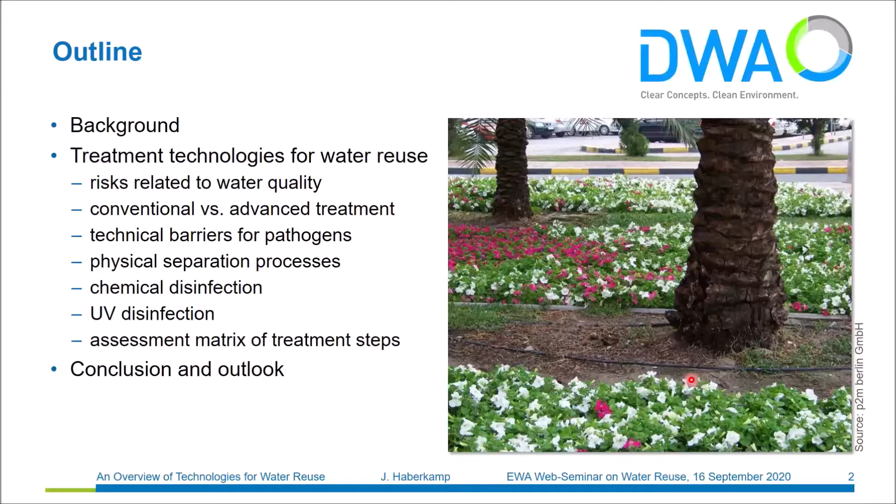I am giving this presentation as well on behalf of our DWA working group on water reuse. DWA is the German Association on Water, Wastewater and Waste. And our working group on water reuse is one of more than 350 specialist groups within DWA. Currently we are around 15 experts from different institutions. And I won't go more into detail, but as you see, Dr. Lahnsteiner is also a member of our group, and he will give a presentation on case studies later on.

Besides the definition of technical standards, especially focusing on wastewater treatment, DWA also publishes a more or less loose series of so-called DWA topics dealing with different issues in terms of water management and water treatment. And our working group has published a topic on treatment steps for water reuse in 2008, where a variety of different treatment technologies were characterized and assessed with regard to non-potable water reuse, focusing on irrigation.

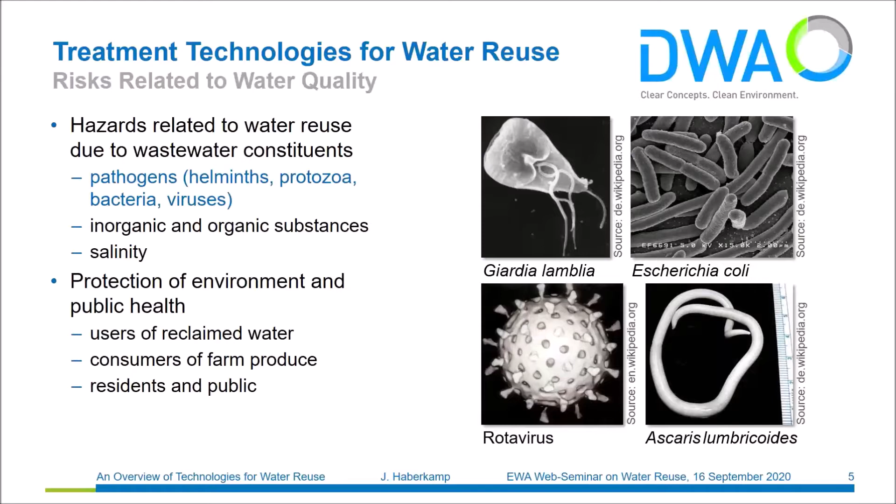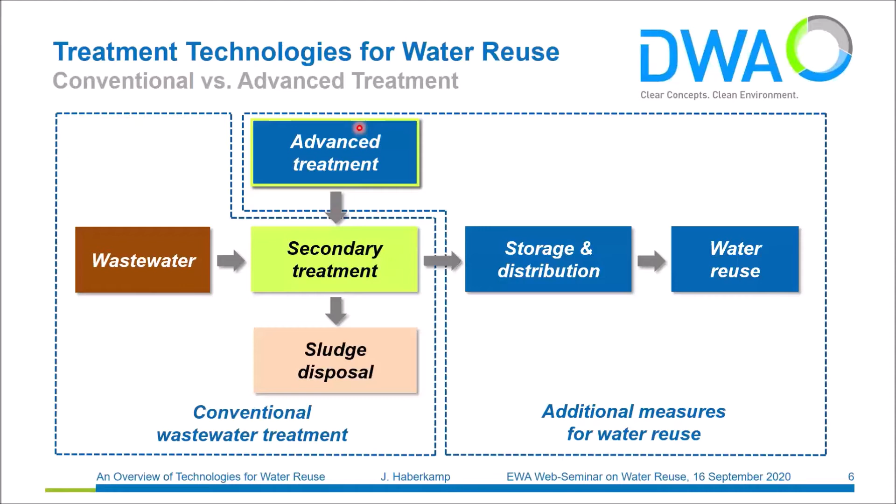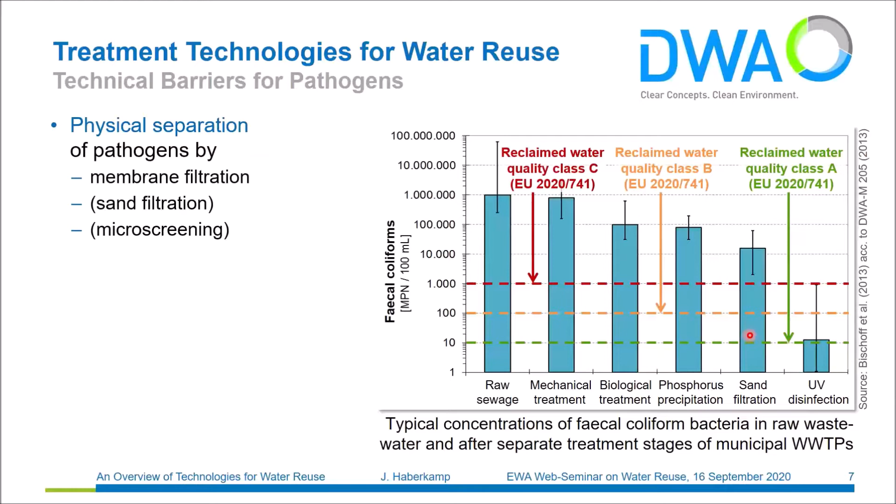So disinfection of secondary effluent can be achieved by different means, by different categories of technologies. First of all, there's the physical separation of pathogens, which can be efficiently achieved by membrane filtration. I also added sand filtration and microscreening, but I put it in brackets because, as you already saw on this diagram, sand filtration does not lead to the removal of bacteria and viruses, and the same holds true for microscreening. But sand filtration and microscreening can remove protozoa and helminth eggs.

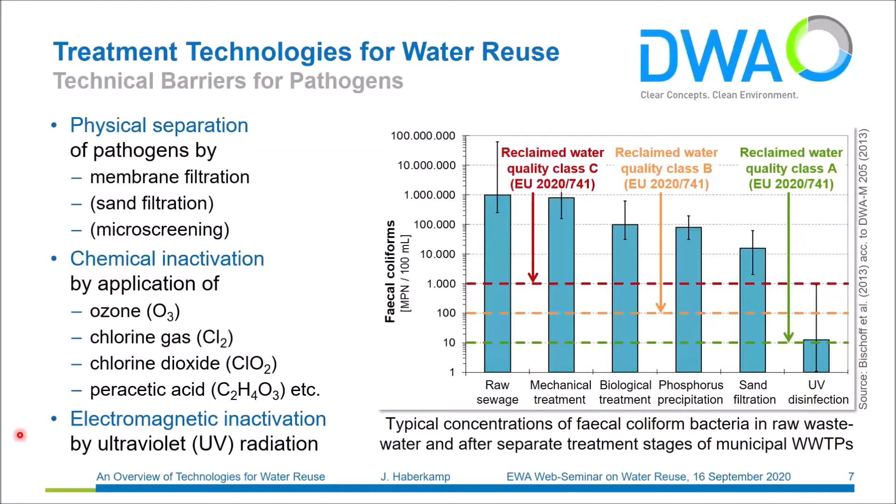Then there is the use of chemical disinfectants, which can be, besides chlorine gas or chlorine dioxide, also ozone, peracetic acid, and others. And finally, disinfection can be achieved by the use of electromagnetic radiation, which usually means UV radiation.

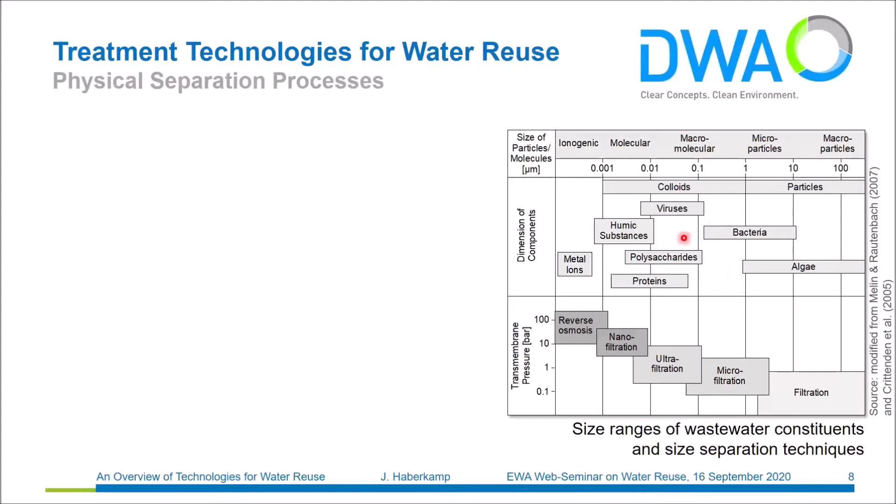So when we try to physically separate these microorganisms from the wastewater, we can use low pressure membranes, which include ultrafiltration and microfiltration membranes. The pores of these membranes are so small that not only protozoa, helminth eggs, and bacteria are efficiently retained, but also partly viruses, which are often attached to other particles.

A drawback of the very efficient membrane filtration is that it has increased demands in terms of energy input, pre-treatment, as well as operation and maintenance.

Sand filtration is a cheaper alternative for the removal of protozoa and helminth eggs. But as you already saw on the previous slide, bacteria and viruses cannot be removed by sand filtration. So in order to achieve efficient disinfection using sand filtration, another disinfection step has to be added, usually UV disinfection.

And in terms of microscreening or microsieves, the removal efficiency is quite comparable to sand filtration, depending on the mesh size of the microsieves.

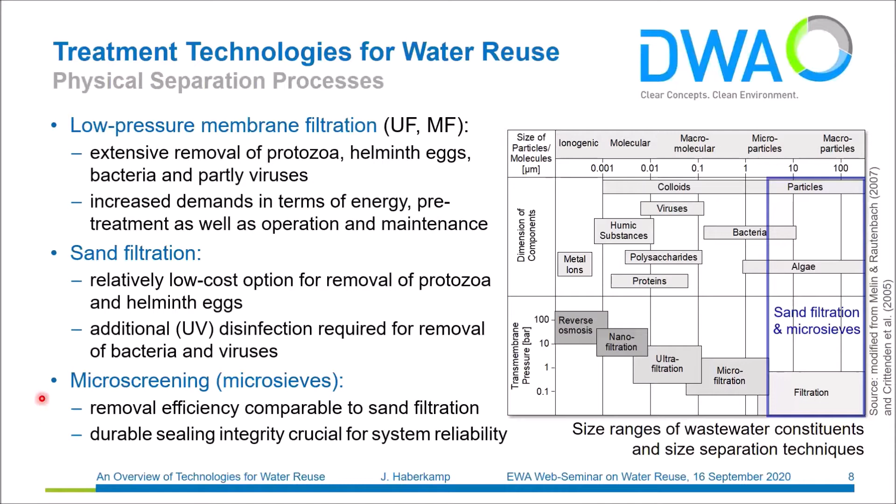But there's one neuralgic point in terms of microsieves. The removal efficiency is not only defined by the mesh size, but also by the integrity of the sealing of the microsieves. The microsieves are attached to some kind of supportive structure, and from time to time they have to be removed, physically cleaned, and then put back again. With time, this sealing suffers, so experience has shown this is often quite a crucial part of the system.

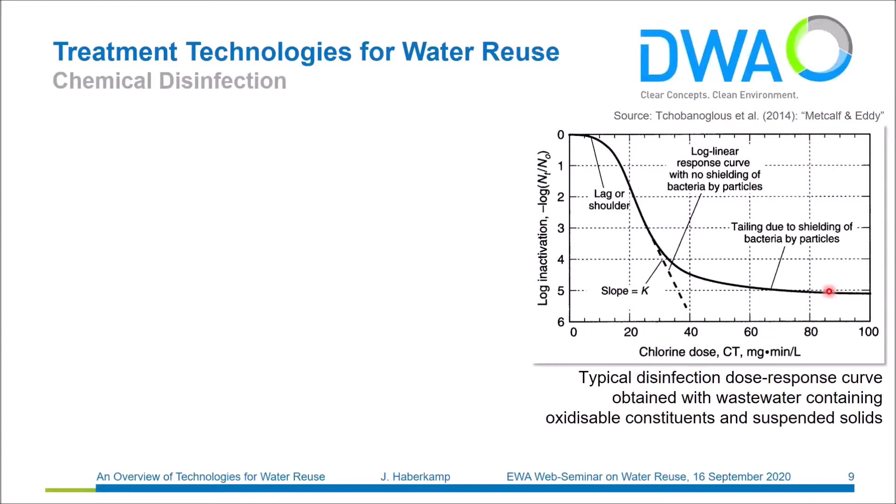If you use a very low dose of chemical disinfectant, the efficiency is also very low, because much of the chemical is first used for reactions with dissolved substances and not for killing bacteria or other organisms. With increasing dose, efficiency increases, and usually a certain plateau is achieved where there's no further increase in effectiveness, because some microorganisms are attached to particles and shielded by them. So the more particles contained in the secondary effluent, the more complicated it gets to achieve a high disinfection efficiency.

Very famous chemical disinfectants are chlorine gas and also sodium hypochlorite. The disinfection efficiency of both is based on hypochlorous acid, and therefore it is only efficient at pH below 7.5.

During the reaction of chlorine gas and sodium hypochlorite in wastewater, it reacts with a lot of other organic and inorganic compounds, resulting in the formation of harmful disinfection byproducts, which are harmful not only for the environment but also for human beings. Use of chlorine gas is hazardous for plant workers and also for the public, as repeated accidents unfortunately show.

But chlorine gas is quite cheap compared to other disinfectants, and it has a big advantage in terms of residual disinfection capacity, which is kept during the storage and distribution of the treated or reclaimed water in the system.

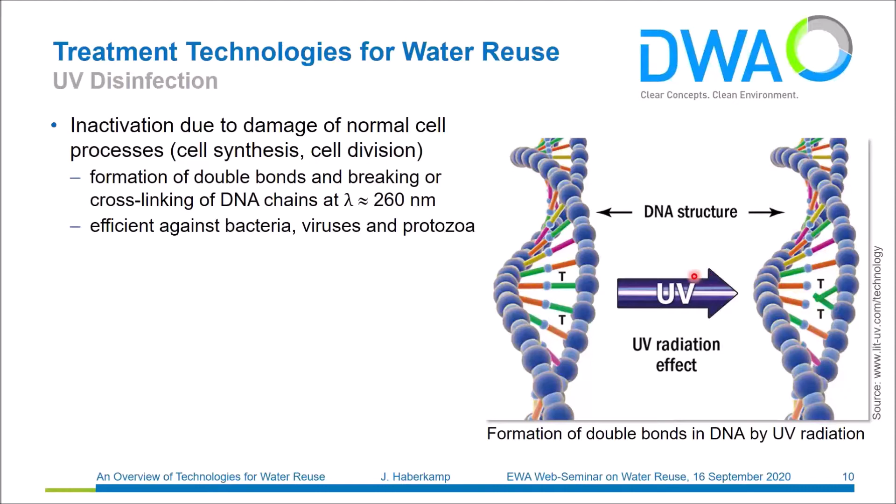Finally, UV disinfection. UV disinfection is based on the inactivation of cell structures or cell processes. When UV radiation is absorbed by DNA at a certain wavelength, around 260 nanometers, reactions happen that should not happen in bacterial DNA, causing a cross-linkage of certain components of the DNA, leading to the inactivation of the organisms.

The efficiency of UV disinfection strongly depends on the concentration of suspended solids and on the transmittance of the solution. It's strongly recommended to have total suspended solids concentrations below 20 milligrams per liter, preferably below 5 milligrams per liter. Therefore, combination with a previous filtration stage, such as sand filtration or microsieving, can result in a higher efficiency of UV disinfection.

A big advantage of UV disinfection is that there's no disinfection byproduct formation, but since UV disinfection also does not have residual disinfection capacity within the network, there might be regrowth of microorganisms surviving this disinfection step.

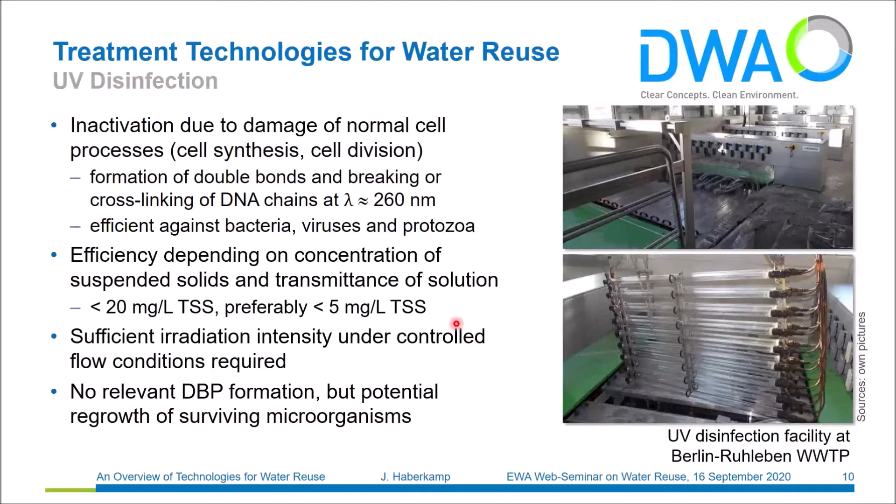So keeping the time in mind, I will quickly jump back to our DWA topics on non-potable water reuse, where we considered a variety of treatment processes for protection against pathogenic organisms in detail. And we developed an assessment matrix in order to provide fast and simple support in taking a decision for a suitable combination of treatment technologies, focusing on subsequent water reuse.

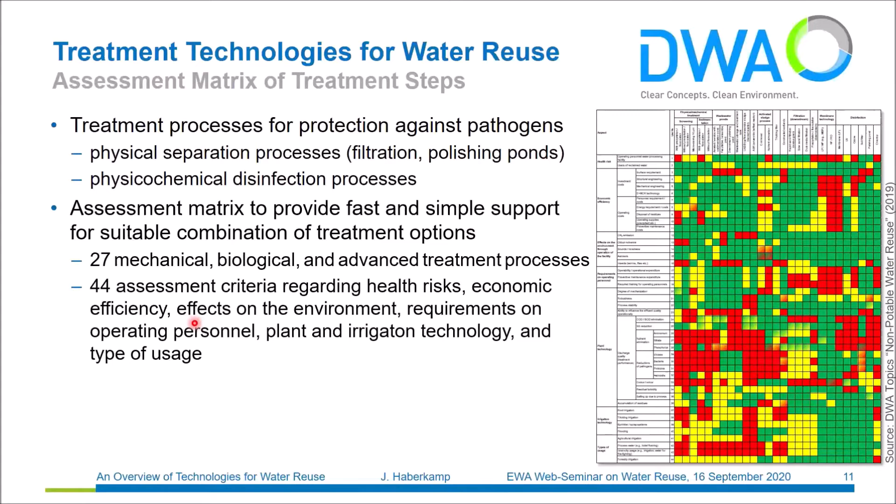In this assessment matrix, we considered 27 different mechanical, biological, and advanced treatment processes, and evaluated them with regard to 44 assessment criteria in terms of health risks, economic efficiency, effects on the environment, but also requirements on the operating personnel and plant and irrigation technology, always focusing on the type of use. An important point is that the type of use has always to be kept in mind in order to produce a water quality which is fit for purpose, for irrigation or the purpose of reuse.

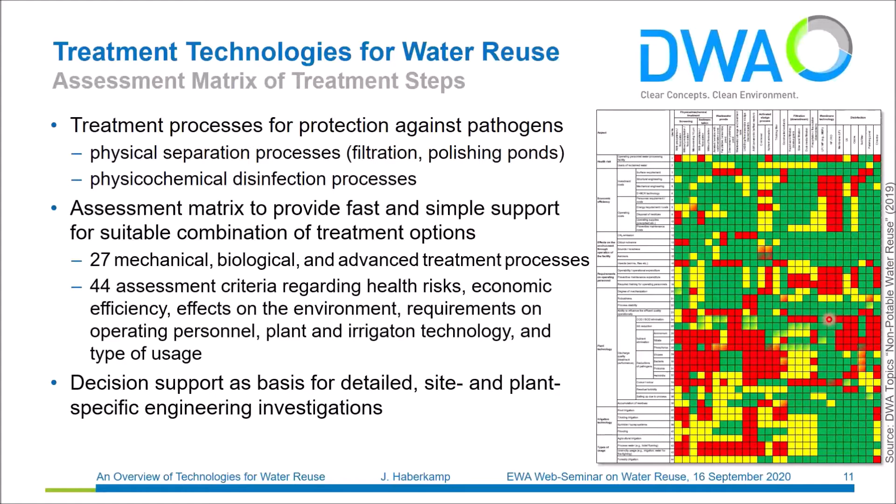This decision support should only be a basis for further, much more detailed site and plant specific investigations. What you see here, this kind of traffic light matrix, should only give an overview about the general structure. The actual matrix is much more detailed. This is just an excerpt for physical treatment processes.

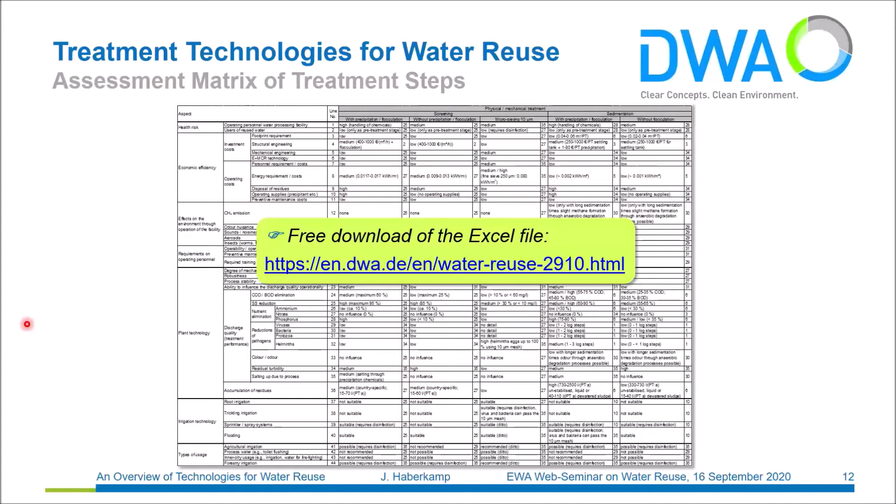On the left side are the assessment categories, which are then evaluated either qualitatively or quantitatively, always giving the source of the data. You can get the entire assessment matrix free of charge via the website of the DWA, and as Mai said in the beginning, you will get the slides tomorrow, where you will also have this link.

So to conclude, you don't have to be a prophet, I guess, to forecast that water reuse will become more and more relevant against the background of climate change. There is a variety of state-of-the-art technologies available in order to provide the water quality that is required for safe water reuse.

But it is very important not only to focus on advanced treatment, but also on the conventional treatment. That means the secondary treatment, because a stable secondary treatment is the precondition in order to achieve a reliable efficiency of the subsequent advanced processes. And as I said, water treatment can only be one component of a comprehensive multi-barrier system.

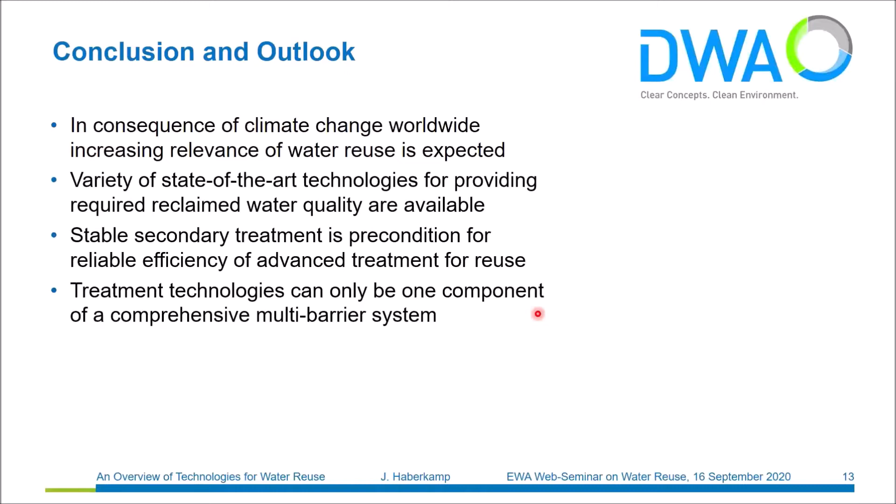Finally, our DWA topics on non-potable water reuse consider these different treatment technologies quite in detail, but beside this, you can also get a further overview regarding regulatory, ecological, socio-economic, and energetic aspects related to water reuse. So, thank you very much.

He is a full professor at the Lisbon University in Portugal, where he is teaching water supply, urban drainage, and water quality courses at master and PhD level in the civil engineering and environmental engineering section. He was involved in hundreds of water management and water reuse projects in Asia and Africa. Currently, he is the president of the Civil Engineering, Architecture and Geo-Resources Department of the Lisbon University, and at the same time president of the Portuguese Water Partnership. So, José, please, the floor is open for your presentation.

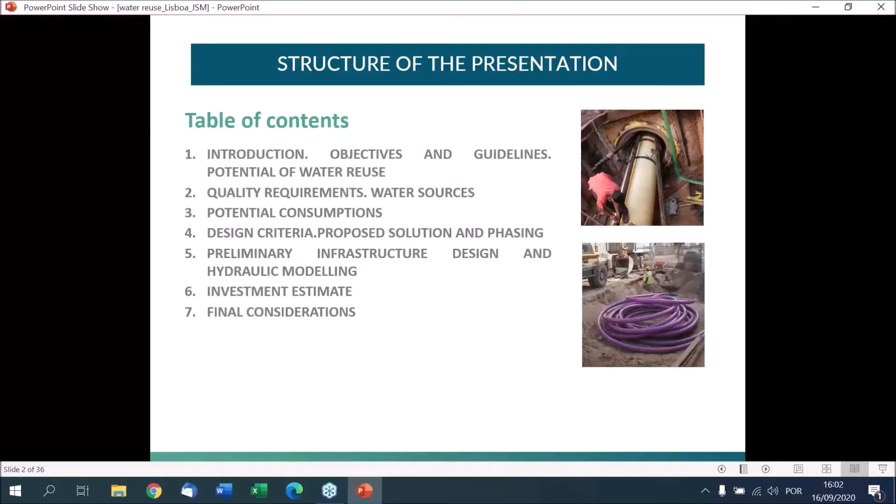This is the table of contents: introduction, objectives and guidelines, potential of water reuse, I will do a quick view of that, quality requirements, water sources for the Lisbon city, potential consumptions in terms of water reuse, design criteria for the water reuse system, proposed solution, phasing, preliminary design, investment estimate, and final consideration. So it's a case study.

This is based on a strategic plan that I've been involved in for water reuse in the Lisbon city, developed just one year ago for Águas do Tejo Atlântico, the utility that manages the wastewater system in the Lisbon area, not just in Lisbon but the surrounding area, for more than 2 million people. Lisbon itself has more or less 500,000 people, not counting tourist contribution.

The objective of this master plan, of the municipality and of the utility, was to have all the urban cleaning and all the irrigation of parts of the city supplied by water reuse by 2030. This was the goal.

Of course, the benefits of water reuse include social and environmental benefits, releasing drinking water essentially for human consumption. The water coming from the drinking water of Lisbon comes from the Castelo de Bode Reservoir, about 140 kilometers far from Lisbon. So it's a long distance.

So this is the reservoir of Castelo de Bode with a large pumping system, the dam, the water treatment plant. For the water to arrive in Lisbon, it consumes a lot of energy, a lot of chemicals, a lot of materials, and a lot of human resources for operation and maintenance.

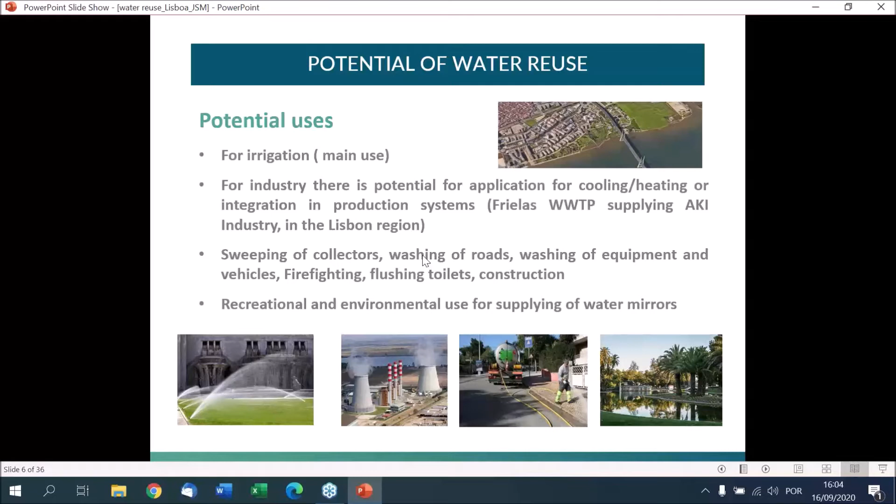This is the uses that are planned for the Lisbon city. So you have irrigation, and it will be the main use. I would say that at least 2/3 of the water use is for irrigation, but also for cooling, for sweeping of collectors, washing roads, and so on, and also some recreational and environmental use. So all these types of uses will be applied.

Concerning the availability in Lisbon, you have three large wastewater treatment plants. The major is Alcântara, that serves not just Lisbon, but also some municipalities in the surrounding area. So you have three: in the west part, Alcântara; in the east part, Beirolas; in the central part, Chelas. On average, you have enough water from the treatment plants to meet consumption. Even at peak consumption for irrigation, as far as you have local storage, you have capacity for all the water uses. In blue is the wastewater flow available from the treatment plant of Alcântara, in red is from Beirolas, and in green is from Chelas.

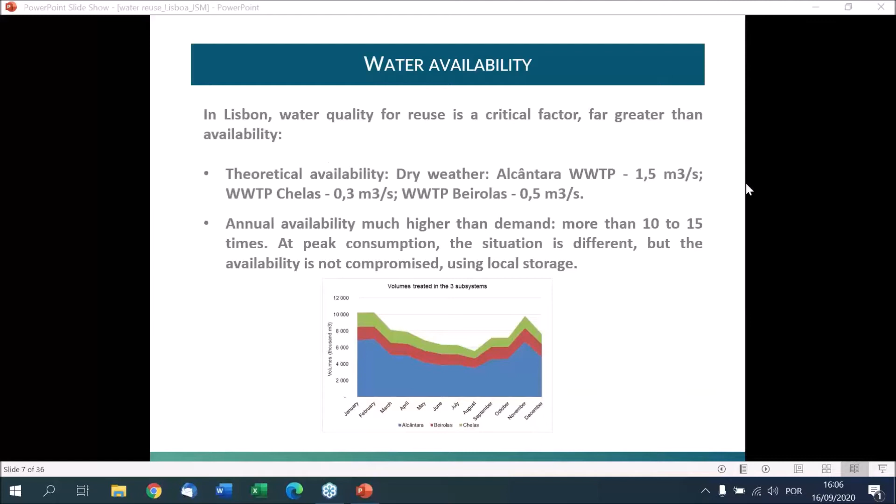So it means that the critical factor is not the quantity, the critical factor is the water quality. At the time we developed this master plan, the European regulation was not approved, but even so the draft was available. Concerning this strategic master plan, it was aligned with the figures and with the requirements of that regulation.

So some information: it serves a lot, not just Lisbon, but a lot of municipalities. Typically we have combined sewers, separate systems, partial separate system sewers. This is the average flow depending on the month of the year, and it treats the wastewater of 2/3 of the city, about 600,000 inhabitants.

The Alcântara plant is very well known because of this large green roof, which I think is the biggest in the Iberian Peninsula. It's 4 hectares of green roof. This is Avenida de Ceuta, very well known, and nobody smells the wastewater treatment plant. So it's a modern treatment plant.

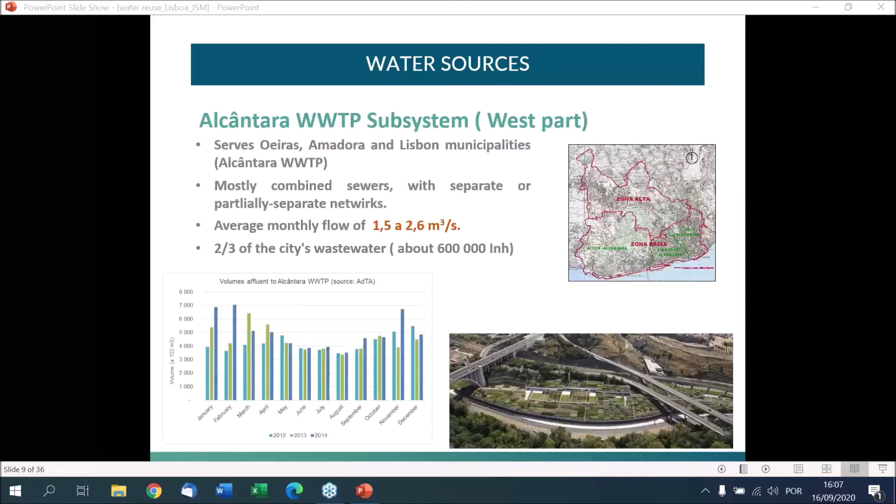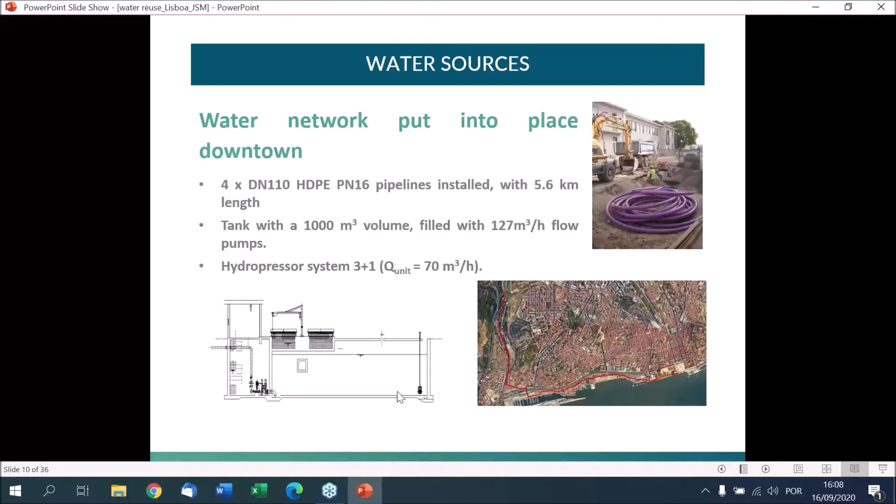Some of the works have already been executed. Downtown, the piping for reuse and some uses are already in place, principally for washing roads. This water is being reused for cleaning the roads, so we save the water coming from Castelo de Bode, which is of great quality. And of course, you have not just pipes, but storage, pumping installations, and so on.

This is the other system. In the east side is the Beirolas wastewater treatment plant, mainly combined system also, but the average flows are a little bit lower. But even so, close to the treatment plant is the Expo area, so there are a lot of parks and gardens that can also use this water for irrigation purposes.

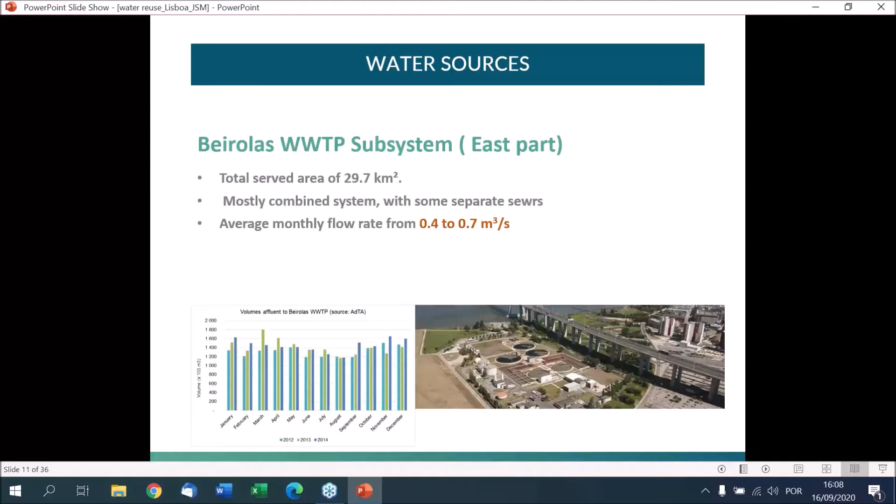One interesting thing is that in Lisbon you are preparing, in fact have prepared, and the tender was launched last year, for the construction of two big tunnels. These large tunnels are 5.5 meters diameter at least, just for controlled flooding. But these tunnels cross the city. There are two tunnels crossing the city, and you will use these tunnels just as a means to transport along the route. In the invert, you put some pipes, a 300 millimeter pipe, just for transporting the water from the treatment plant, and to deliver it at certain points along the city in order to facilitate the transit.

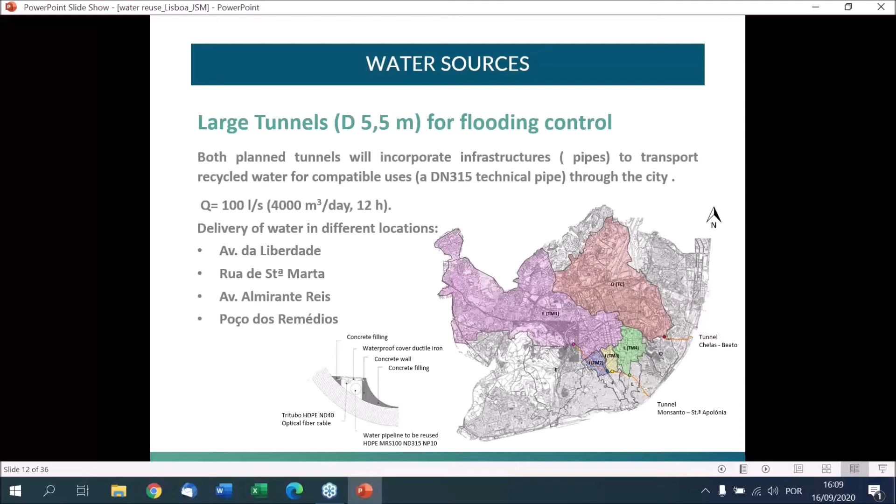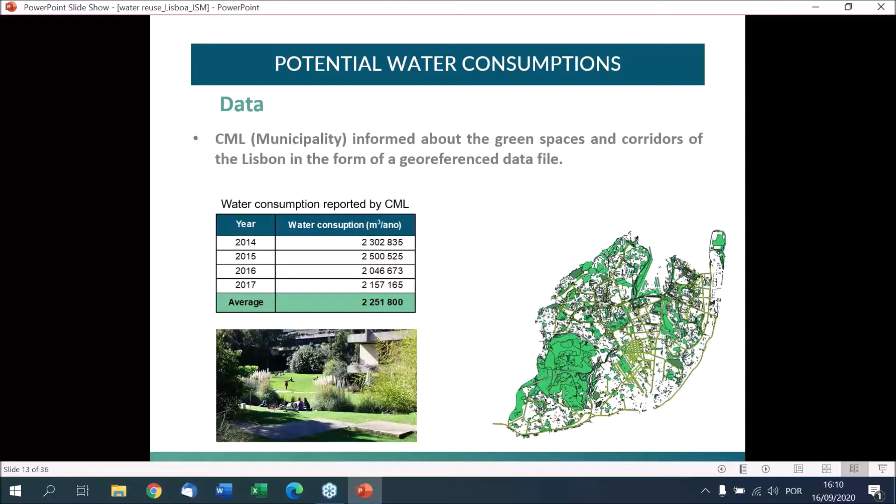Well, all this data was delivered by the municipality. It was georeferenced data concerning historical documentation about water consumption at different points of the city. With all that information, and also with the planned works for the next 10 years, we computed the needed consumptions of the future. Of course, you have more than 40% for green areas, but you also have a good share for street washing and for other purposes.

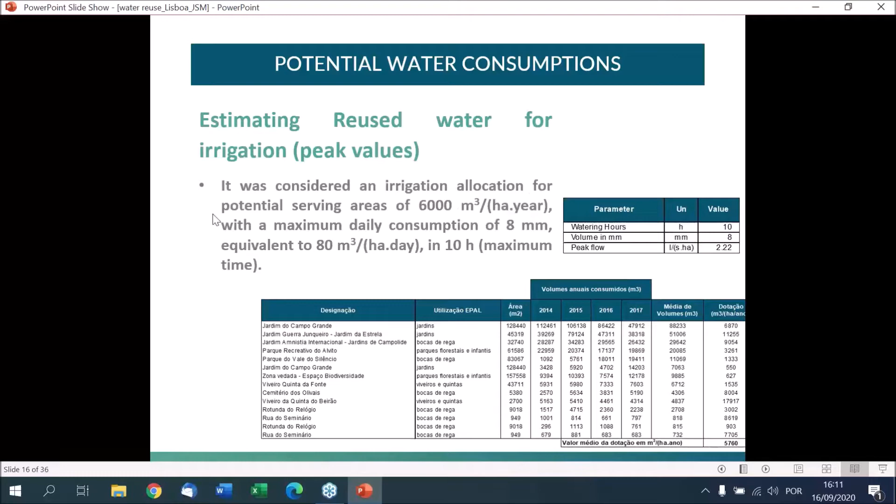And this is just irrigation. Each park will have at least 6,000 cubic meters per hectare per year that you need, with some peak consumptions. All that has been introduced, and water for urban cleaning. All that was introduced in the hydraulic model, just to design the pumping systems, the storage, and the pipes.

Of course, there are some principles, the definition of the routes. Sometimes when you have underground infrastructures with available space, you use it to put the pipes without disruption of the surface. In other situations, you have installed the reused water pipes below the drinking water infrastructures and above the wastewater sewers with a minimum distance, in order to ensure protection against contamination.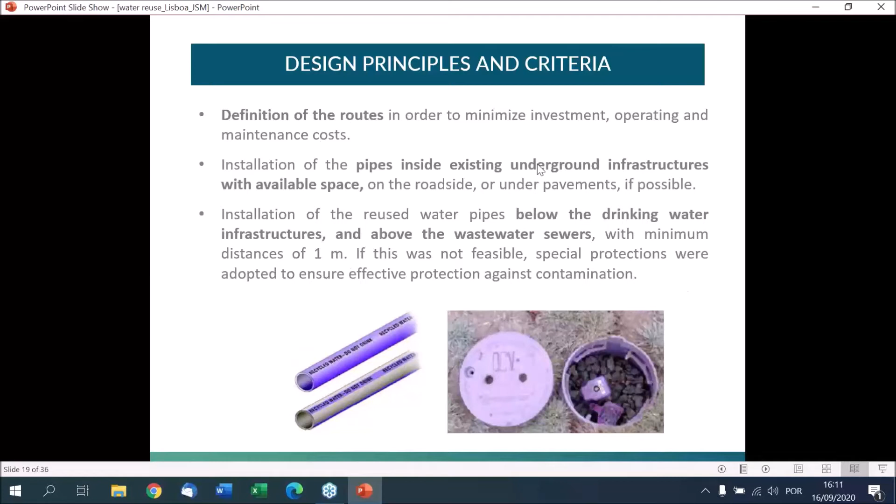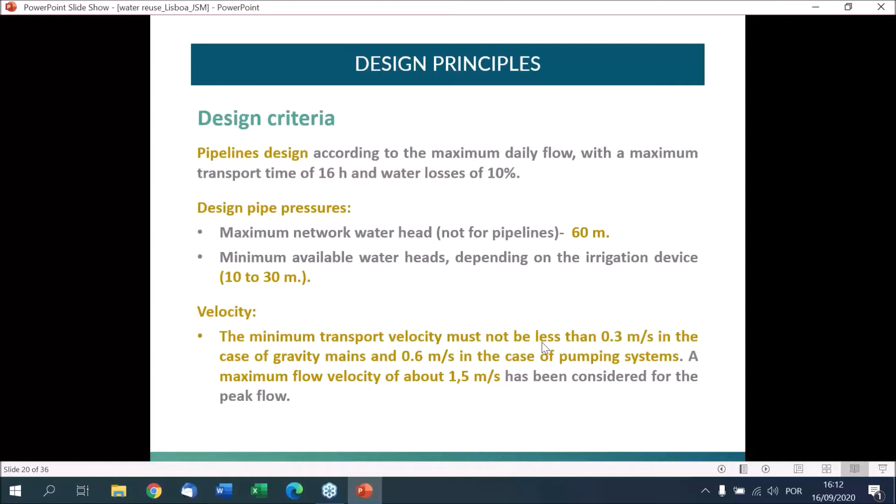So all these cares have been taken. This is very typical design criteria for the pipes and for the velocities: very typical, 0.3 for gravity mains, 0.6 for the case of the pumping systems, maximum velocity of 1.5 meters per second. So it's typical of water systems that you have used also in that case.

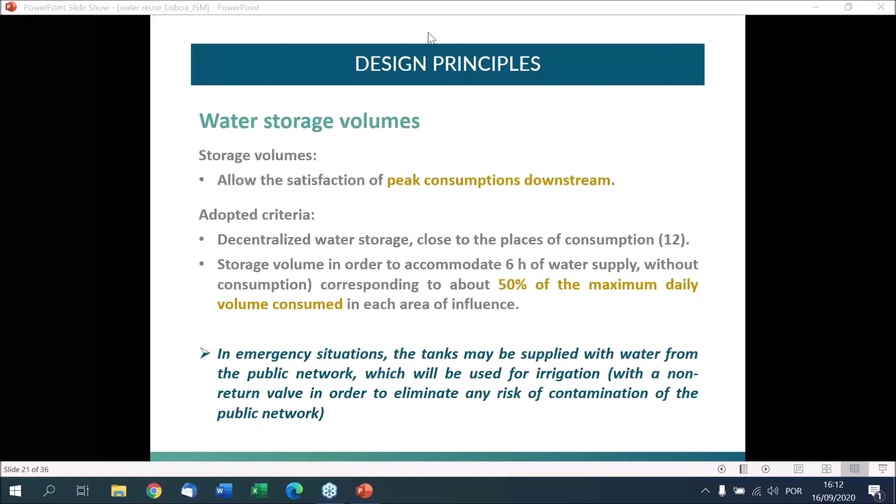Of course, the storage, the local storage volumes were taking into account the peak consumptions also. When emergency situations prevail, the tanks may be supplied with water from the public network. And there is, of course, a non-return valve in order to eliminate the risk of contamination of the public network. So all this has been taken into consideration.

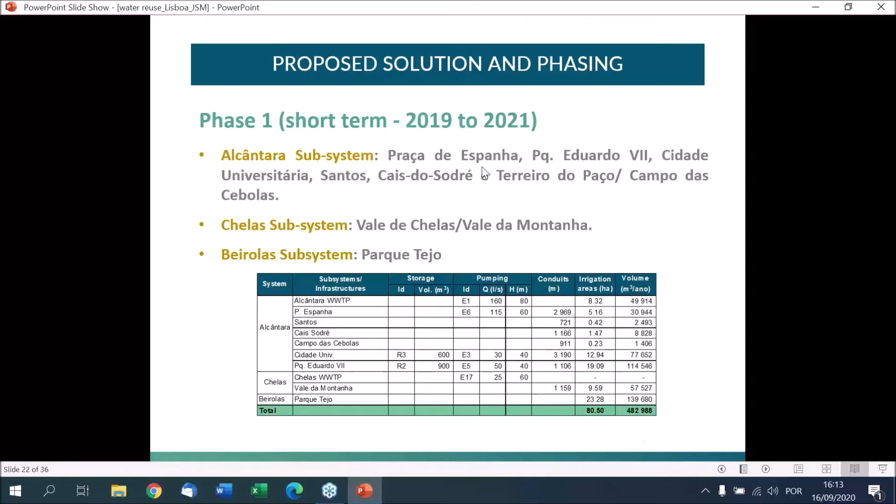And in the master plan, three phases have been planned. A short-term phase: you have the storage volumes, just 2 storage volumes, but 5 pumping stations, a lot of pipes, the areas to be irrigated, the volume planned for irrigation for each year. This is defined well in this map. A second phase between 2021 and 2023, and the third phase between 2023 and 2025.

So all of this allows, if this program will be accomplished - I'm not sure because of this coronavirus crisis, the works have slowed down a little bit - but I'm thinking that after all these pipes, all these pumping systems, all these storage rooms will be in operation, the great majority of the city will be served by this system.

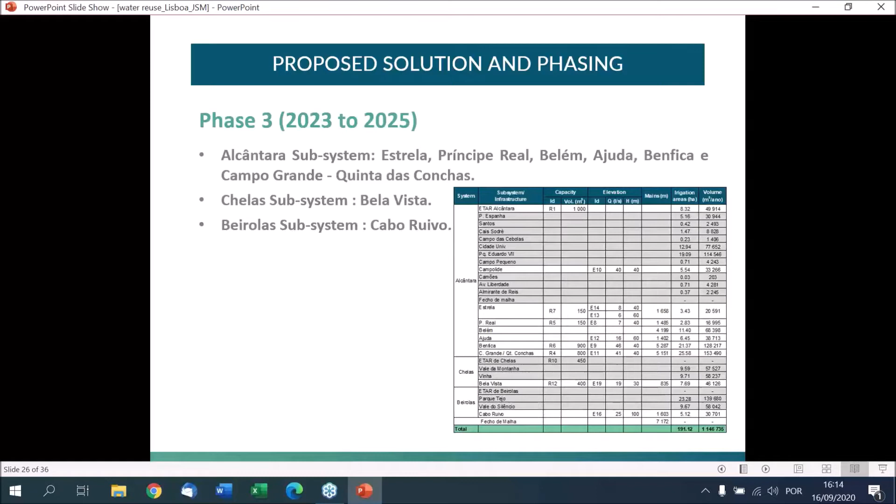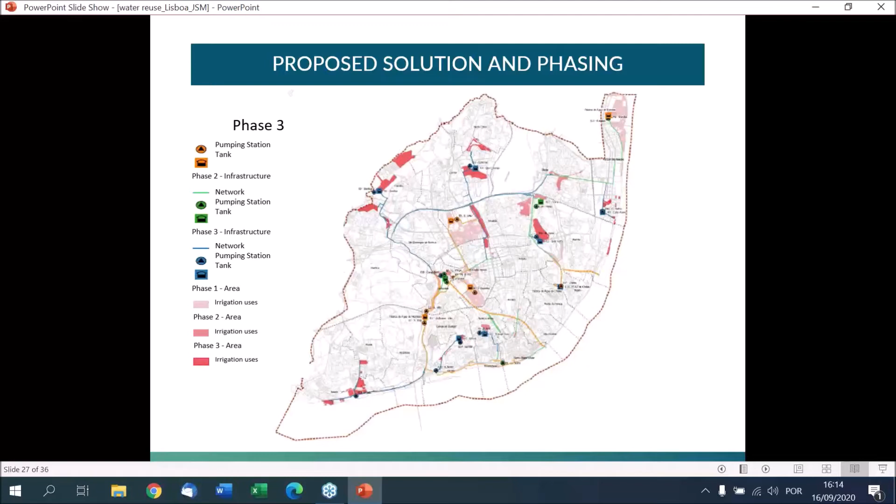So here you have a network of pipes with some pumping installations and a lot of storage volumes. It's more than 50 kilometers of pipes, more than 12 storage volumes, about 20 pumping systems, and you just cover the great majority of the city. So this is the timeline. I will just jump - this is the number of pumping installations.

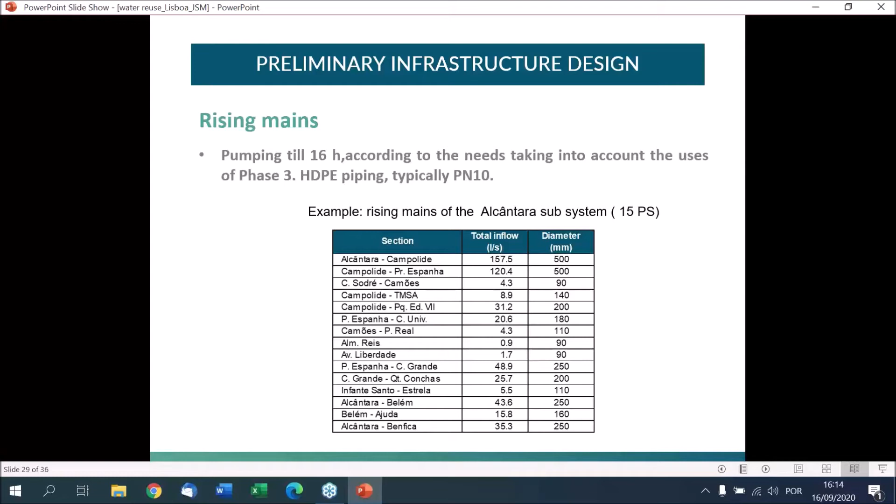15. And of course you have needed to use the hydraulic model, and you just use the freeware EPANET developed by EPA. It's very well known in the world, a lot of people use it, and of course you have done a lot of simulations for different scenarios for phase 1, 2, and 3.

And with these simulations, you were able to design the pipelines, to assess the pump flows, the head losses, the pump heads, and optimize the volume of the storage tanks.

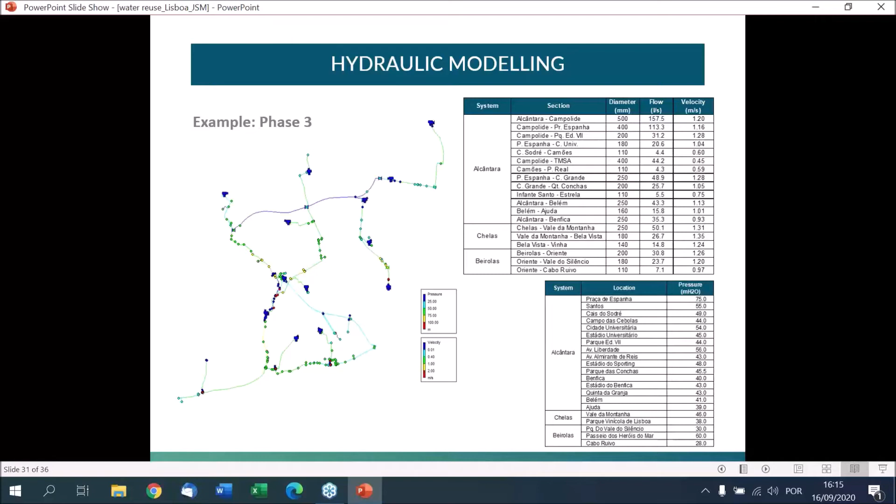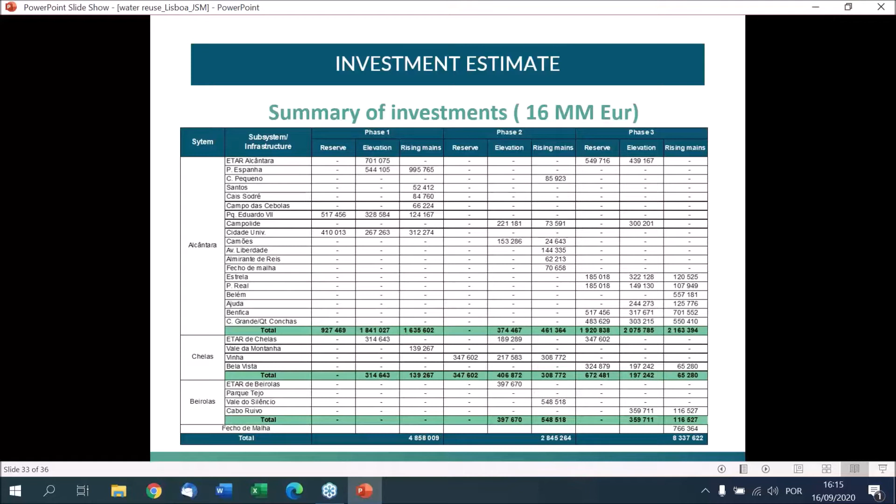Now, this is just an example with the range of velocities all along the main. Of course, this is just the main pipes, the main trunk pipes, and the investment cost you estimate is not so much. It means that, well, you have a lot of infrastructure, but because some of them are of very small diameter, the sum of investment as planned in 2018 or 2019 was less than 20 million euros. So it's not a really very high cost.

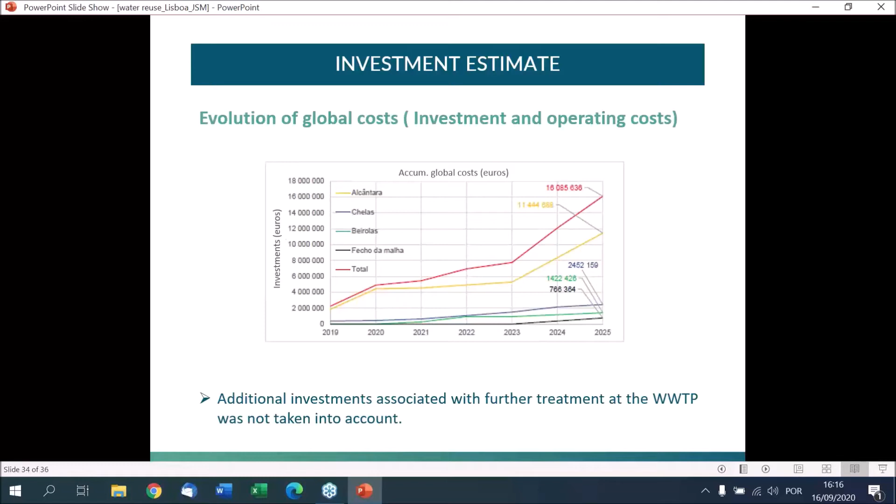This is the global investment. In red is the total, but you have 3 subsystems, which are the areas served by each one of the 3 treatment plants of Lisbon. Of course, you have also estimated operation and maintenance costs, but I will not present the operation costs.

Just to finalize, I would say that this strategic plan is being carried out in 3 phases. The water will be supplied by the 3 wastewater treatment plants of Lisbon: Alcântara, Beirolas, and Chelas. It includes the construction of about 55 kilometers of water mains, 16 pumping systems, and 12 storage tanks. The irrigation is not so large - you have not a lot of parks in Lisbon, it's less than 200 hectares of green spaces - but all of them will be irrigated with this water.

This water from the treated effluents of the wastewater treatment plants, and over 1.2 million cubic meters per year. And this is the investment. So I think that this is an alternative water source that will make Lisbon city more sustainable in respect to water, no doubt, more resilient, and better adapted to climate change.

So I think that is something that you are pursuing at the moment, with the involvement, of course, the deep involvement of the municipality of Lisbon and of the Águas do Tejo Atlântico, that is the utility that is managing the wastewater treatment plants.

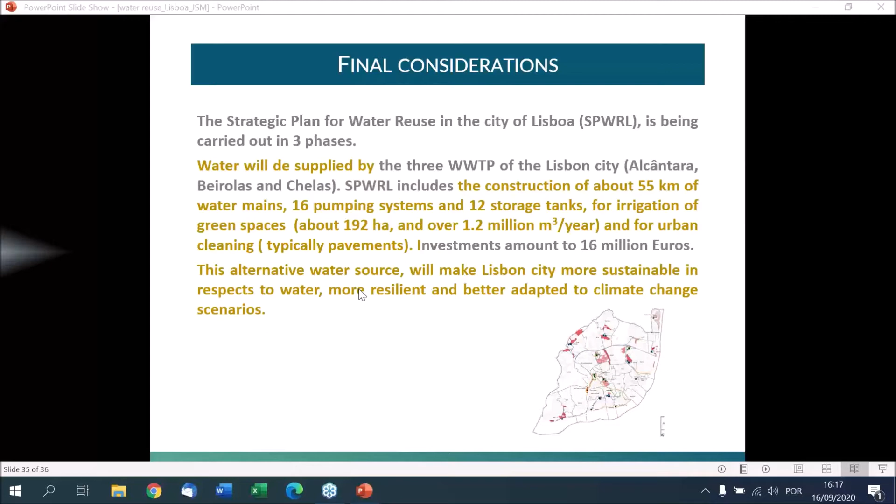Okay. Our next presentation will deal with the public perception of water reuse projects, which is crucial for the success of the project. And the presentation was prepared by Dr. Eileen O'Neill, who is an environmental scientist with over 30 years experience working on water issues. Before founding her own company in 2019, she was the executive director of the Water Environment Federation, one of the world's largest professional associations for environmental scientists and engineers, which is also the organizer of the famous WEFTEC. So, Eileen, if you can hear me, the floor is open for you now.

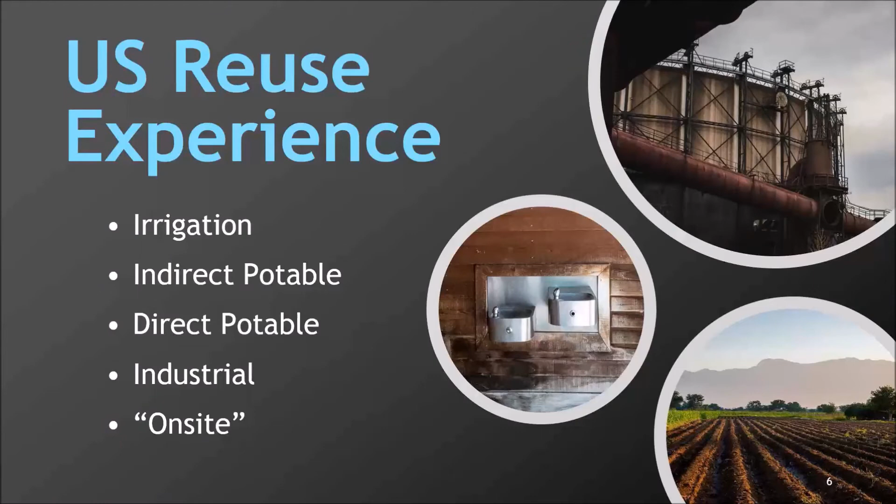We talk about water security or water sustainability. We've got quite a lot of experience in the US. I'm just going to move on in the interest of time. We've been using reused water for irrigation. I think the earliest use, it's definitely in the 1920s. I don't know if it was as early as 1926, but as of about 2002, nearly half of the water produced in California was used for agricultural reuse. We also have seen strong reuse in Florida in terms of agricultural and landscape irrigation, and even more trends that way because of the stress of population growth on water supply.

We also have seen indirect potable reuse in the US. There's a very famous groundwater replenishment scheme where reused water has been drained into the ground to offset saltwater intrusion into the groundwater as it is pumped out for water supply. I'm sitting in Fairfax, Virginia, and within about 20 kilometers of me, there's a much less famous project, where surface water for a drinking water system is being augmented by discharge from the Upper Occoquan Service Authority, and has been since 1978.

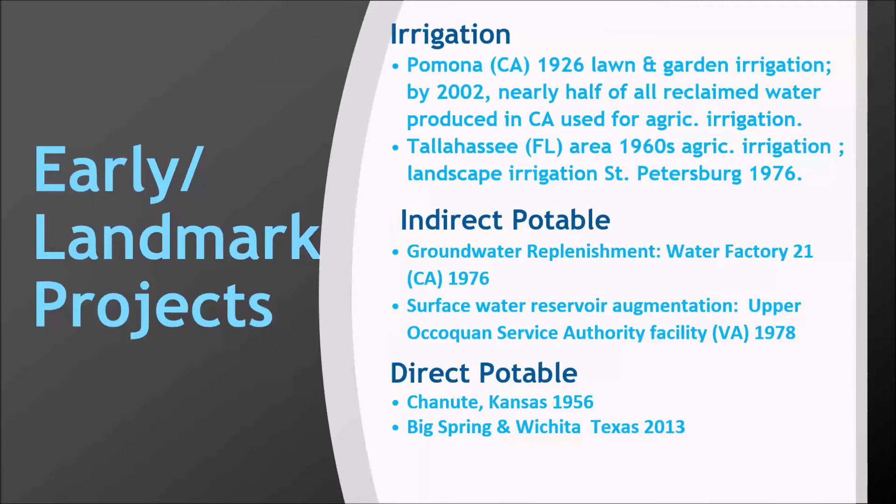I think El Paso, Texas is going to have, I think for about 36,000 people, potable water supply from reuse. And obviously we've had experience with industrial, and something that I find interesting is how people are also thinking about, can we reuse water within a building, within an urban location?

And there are examples from the early 2000s in New York City where some luxury apartment buildings are reusing water within the building for toilet flushing and heating and cooling purposes. And in San Francisco, in certain areas downtown, either new or highly renovated buildings must include a reuse component. So that's interesting to me to see on-site being nested, if you like, within a centralized system.

Overall lessons learned in terms of the softer skills, I think leadership, collaboration, and public engagement are some of those buckets or groupings of what we used to think of as soft skills. Obviously, when we listen to what sort of systems are being implemented, both on the treatment side and the monitoring side, we actually have to have high technical competence, and we have to demonstrate that so that the public believes that these systems are safe. And there's a couple of subcategories within that. Leadership,

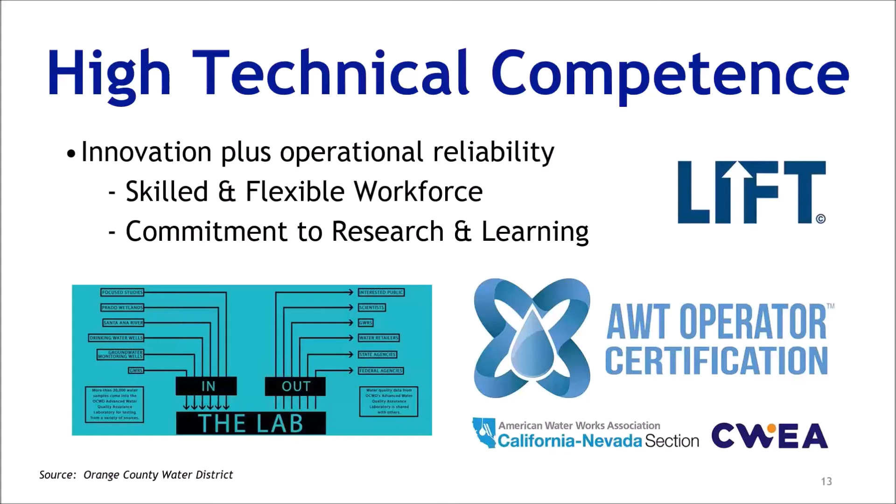And some organizations are working directly with universities. The SWIFT program that I talked about, that is down further in the south of Virginia, their director of innovation is also a professor at a couple of universities, and you'll see that many of their projects, they're working with PhD students embedded on site doing research. So high technical competence is a given.

To come back to actual public engagement, this is, I think, for me, it's been a very interesting process to see involved. And I think the issues in public engagement is that here in the US, we had some really hard-earned lessons. And we learned that you have to start early at the problem-solving stage, saying, here's the situation we're dealing with, and looking at what options might help us.

One needs to cultivate media and public interest and think about broadly what other stakeholders does one need to involve. We have to think beyond, well, we're going to tell the public what we're doing, we're going to inform them. Once they understand, everything's going to be okay. No, we need to listen, and we need to respond when we get that public input, and we need to involve them. And demonstration projects and expert panels have been very helpful, but we're not ever done with this. This is something that continues to need to be addressed.

In terms of the hard-earned lessons, it was LA being Los Angeles, there was a water reuse project that was shut down in 2000 by public opposition. And this is where the toilet to tap terminology came from, and you can see the cartoonists and some of those in opposition really had a field day. Here's a headline from the Los Angeles Times from about that time: potential engineering triumph turned PR disaster. And in 2007, the mayor of San Diego actually vetoed a pilot study.

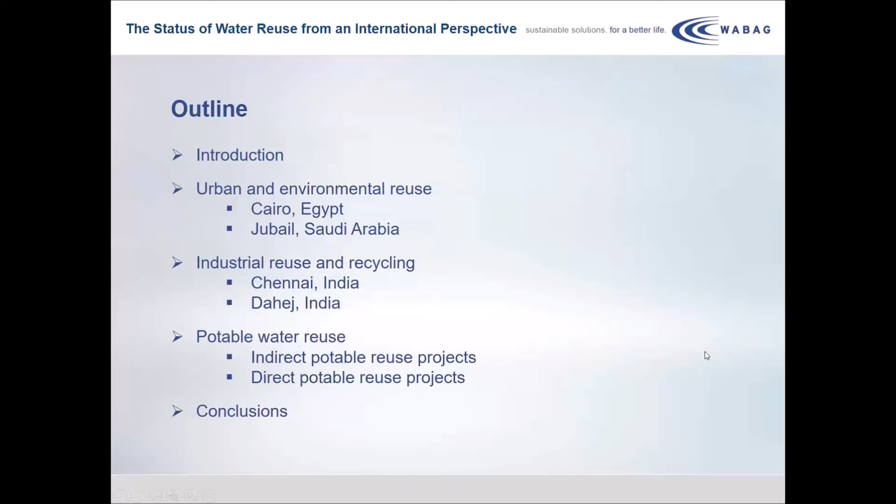The drivers for water reuse and recycling, as José and Eileen addressed already a little bit, are of course water shortage caused by climate change, population growth, urbanization and industrialization. Economic reasons are a major driver. Used water or wastewater is a drought-proof resource, and there is a boost in water supply security. Water risk is also a business risk, or in case of drinking water can be a political risk.

Major drivers are also policies, regulations and guidelines. She addressed the new EU regulation already. An example of a policy in India is the Gujarat reuse of treated wastewater policy from May 2018. In China, the code for design of wastewater reclamation and reuse from 2017 is another example of a regulation.

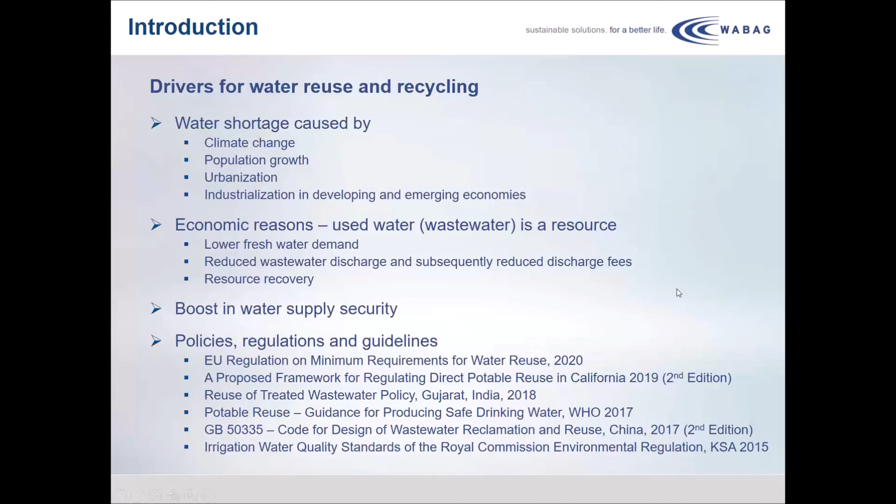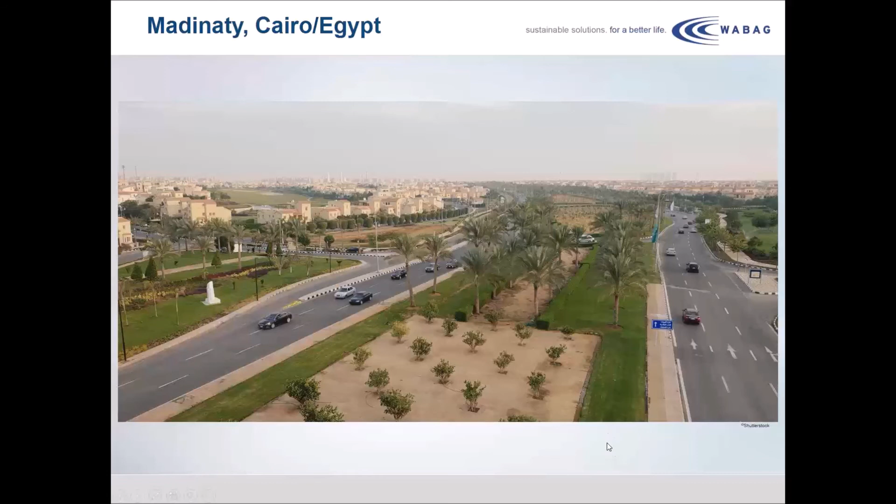Just a moment. I have case 1 and 2: reclaimed water from municipal effluents for urban and environmental reuse in Egypt and Saudi Arabia. In this photograph you can see Madinaty, a satellite city of Cairo. It's new, very modern and green, and needs a lot of irrigation water. The water is reclaimed by secondary and tertiary treatment and disinfection. It's a simple process, but very effective.

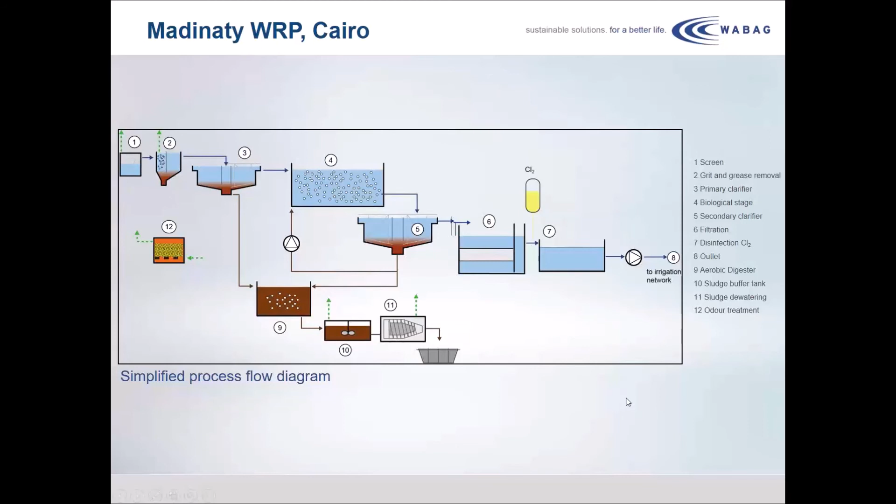The capacity is 2 times 40,000 cubic meters a day. The second phase will be completed next year. On the left-hand side you can see the nitrification tanks; on the right-hand side, the reclaimed water pumping station. The reclaimed water guarantee values are, for example, COD less than 50, suspended solids less than 10, residual chlorine greater than 0.5, and fecal coliforms less than 2.2 per 100 milliliters.

This plant is operated by WABAG Egypt, has been operated for 3 years, and even during the current COVID crisis there haven't been any disturbances. Congratulations to WABAG Egypt, to the WABAG Egypt team. Mr. Yasser Okba is attending from Cairo. Congratulations.

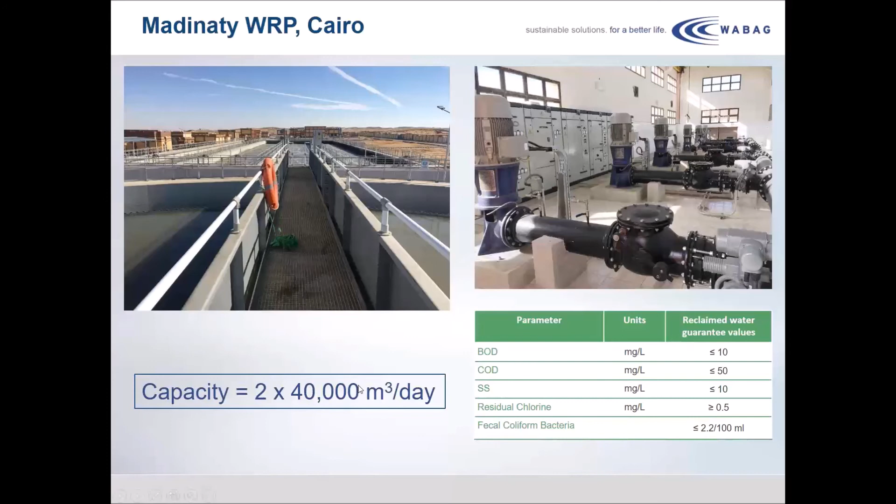Now I come to Saudi Arabia. There is a water reclamation plant under construction. The client is Marafiq Power and Water Utility for Jubail and Yanbu. Contract value 120 million euro. The process is as in Madinaty - secondary and tertiary treatment plus disinfection - with a capacity of 120,000 cubic meters a day.

The irrigation water quality standards from the Royal Commission's Environmental Regulation of 2015 have to be met. Water reuse applications are irrigation of green areas, as in Madinaty, but additionally there is an augmentation of the Sabkhat Al-Fasl wetlands, a very important bird sanctuary.

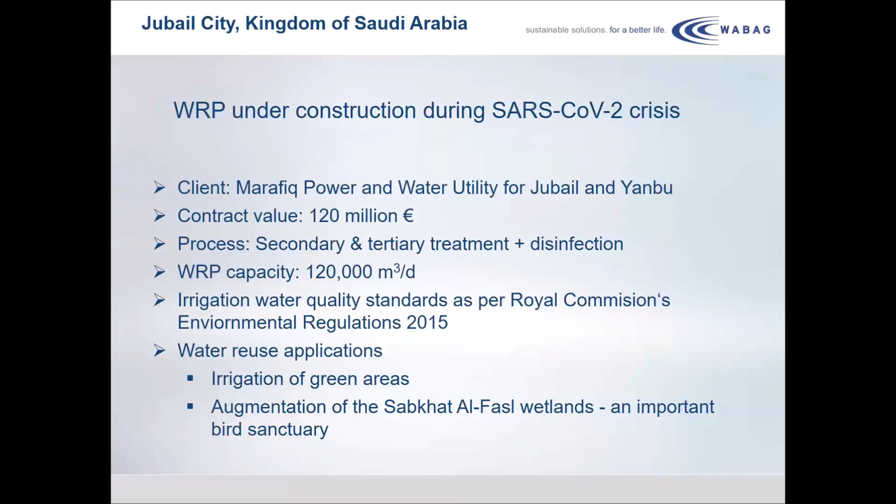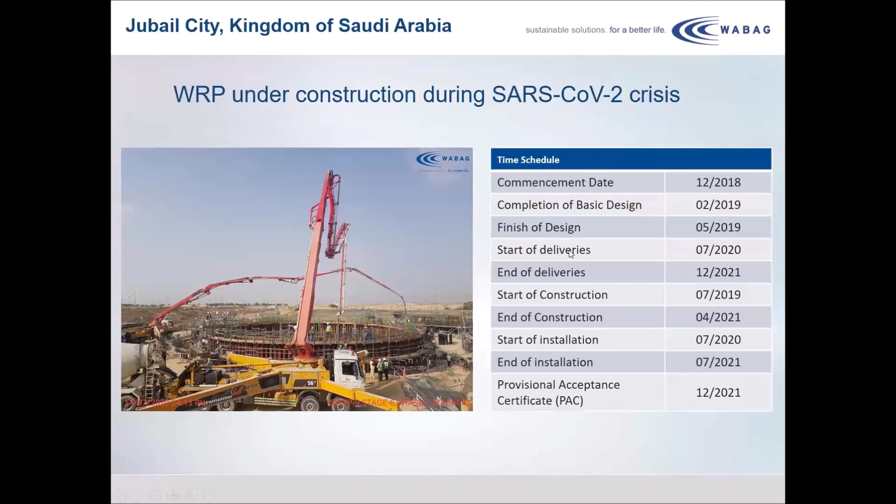The time schedule: construction started in July last year, and the end of construction will be in April next year. Deliveries of equipment started in July this year. The status is that the progress of construction is according to this presented project schedule.

2 million safe man hours without any incidents were achieved in July this year, which means 300 safe man years. At the construction site there are 1,000 people. 5 people were SARS-CoV-2 positive, and 75 had to be quarantined as first and second contacts, but currently there have been no positive cases anymore.

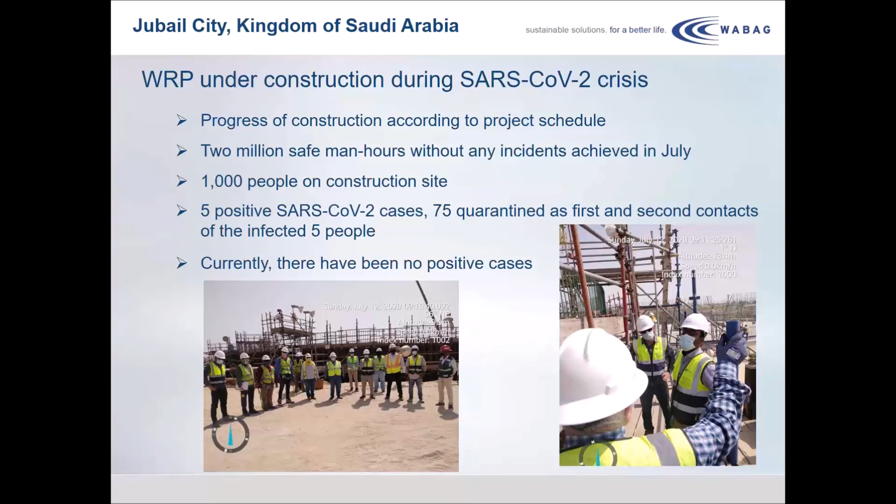So this project's progress is according to the project schedule. I would say under these conditions it's a great achievement. You have to imagine summer temperatures of 40 to 50 degrees centigrade. Jubail is on the Arabian Gulf, so it's hard conditions, and it's a great achievement as mentioned, and congratulations to the project manager and his team, Mr. Srinivasan. He's attending this webinar from Saudi Arabia.

Now I come to case 3 and 4. It's reclaimed water from municipal and industrial effluents for reuse in various industries in Chennai and Dahej in India.

First, Chennai: the Koyambedu water reclamation project is located in Chennai. It's a design, build and operate contract with a capacity of 45,000 cubic meters a day. It was started up at the end of last year. WABAG India has an operation and maintenance contract until 2034. The process is an advanced multiple barrier system, and the reclaimed water is reused in various industries.

Chennai is located on the Bay of Bengal. It's the capital city of Tamil Nadu. The Koyambedu water reclamation plant is in the western part of Chennai, and the reclaimed water is distributed to this area, which is highly industrialized. For example, the water is pumped to Irungattukottai, where there are car manufacturers and automotive suppliers located. It's very important to save fresh water from these reservoirs.

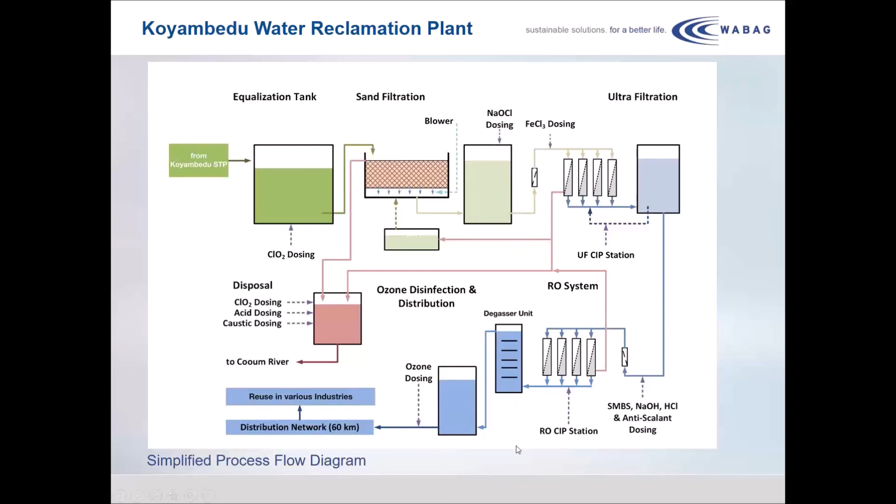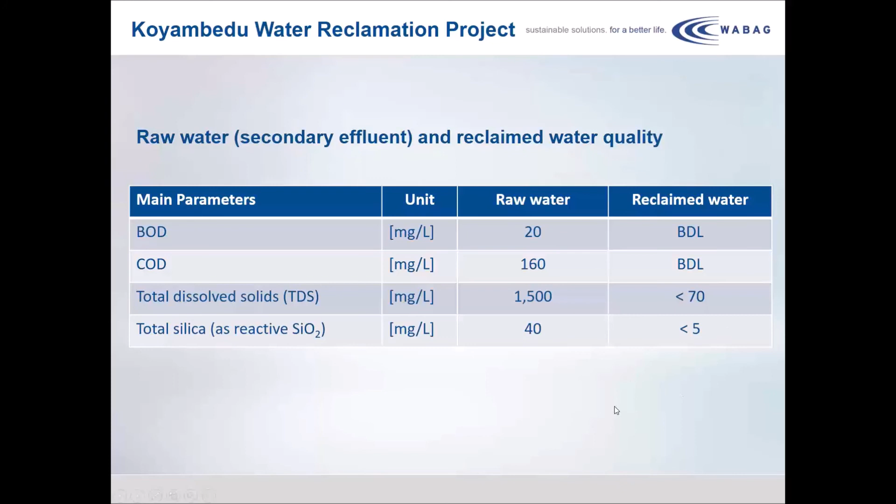The water reclamation process, a simplified flow diagram: we have pre-treatment, core technologies including ultrafiltration, reverse osmosis, and ozone disinfection. Major design parameters for industrial reuse: total dissolved solids, 1,500 in the raw water, less than 70 in the reclaimed water, with current actual values in August less than 50 milligrams per liter. Total silica, also very important: 40 milligrams per liter in the raw water, guarantee value less than 5, and the actual value in August this year was less than 1.

Chennai is a place for advanced water recycling and is very water stressed. Therefore, Chennai has been selected for the next IWA International Conference on Water Reclamation and Reuse, January 16 to 20. It's really the right venue for this next conference. I would cordially invite you to attend physically at this post-COVID event. It's organized by the IWA Water Reuse Specialist Group and the Federation of Indian Chambers of Commerce and Industry.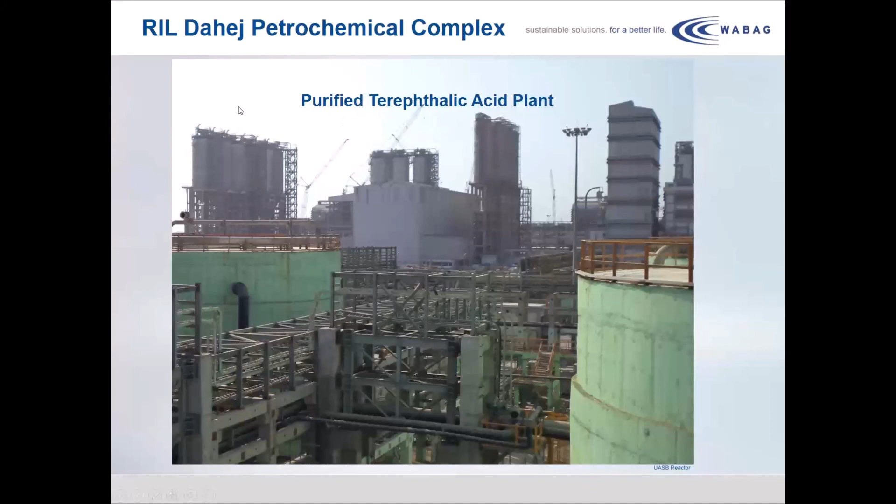Now I come to industrial recycling in Dahej. It's in Gujarat, in western India. It's a purified terephthalic acid plant from Reliance. Purified terephthalic acid is a monomer for PET polymerization, and PET, as you know, is used for example for plastic bottles.

The simplified process flow diagram shows UASB for pretreatment, upflow anaerobic sludge blanket, with membrane bioreactor treatment as another core technology, then reverse osmosis. The permeate is directly reused for cooling tower makeup and, after polishing, for boiler makeup.

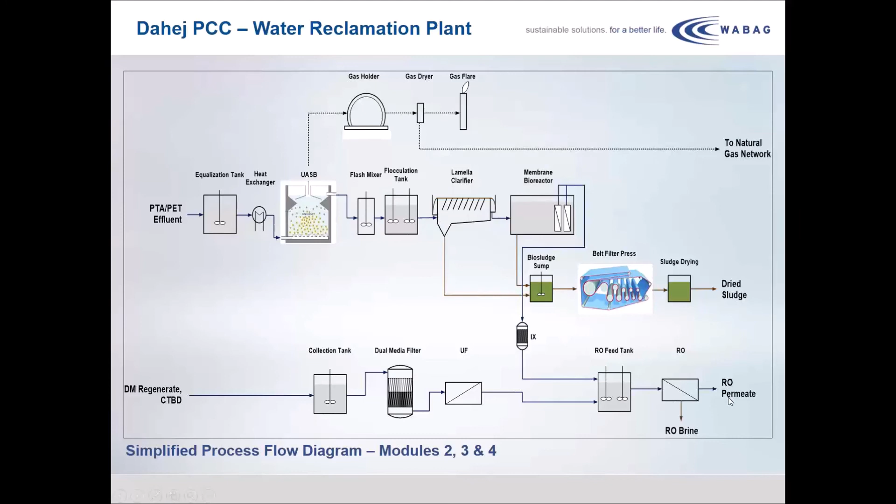Major design parameters, for example COD: 6,500 in the raw water, less than 1,600 after UASB treatment, with a target value of less than 30 after MBR. Actual values are approximately 40 milligrams per liter, and in the RO permeate less than 10 milligrams per liter. TDS: 2,900, and 100 in the RO permeate, with chlorides less than 30.

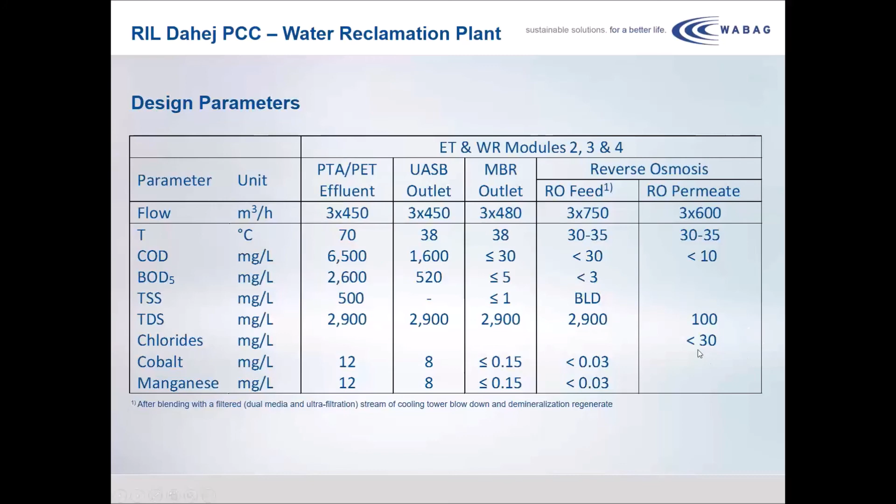Here you can see the UASB reactors, MBR aeration tanks, MBR skid, filtration cells, and reverse osmosis. The membranes are from Toray.

This is one example from India. WABAG India has built more than 20 such plants, and India belongs to the leading nations in industrial water recycling. Congratulations to my Indian colleagues in Chennai, Mr. Senthil Kumar and Dr. Prasad, who are attending this webinar, and in the west of India, in Pune, Mr. Vinod Bharati. Congratulations to all these successful plants.

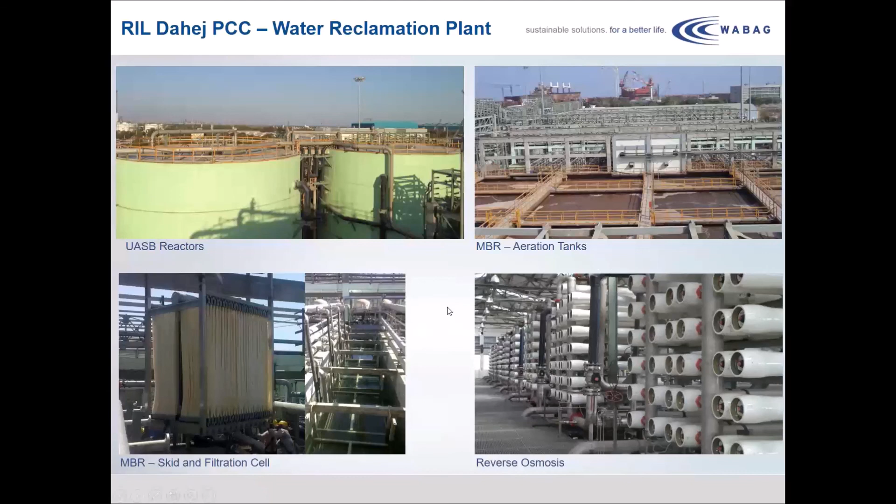This plant was operated without any disturbances during the current COVID crisis, and also the Coimbatore plant, which I described in the last case.

Now I come to potable water reuse, indirect and direct potable reuse projects globally. I start with IPR. The difference between IPR and DPR is that IPR employs an environmental buffer as an additional safety barrier.

The first three IPR projects are the most prominent ones. Eileen addressed the Orange County Water District; they did real pioneering work with Water Factory 21. Toreele in Belgium is doing aquifer recharge. The environmental barrier in the first two is the aquifer, and in Singapore, the environmental barrier is reservoirs. Meanwhile, they have five NEWater plants.

Eileen also mentioned San Diego. For the first phase, the construction tenders were released in August this year.

There are also IPR projects in India, at least under discussion. The V-Valley project in Bangalore is postponed, as Bangalore is also very water stressed. But IPR is also discussed in the megacities of Delhi and Chennai.

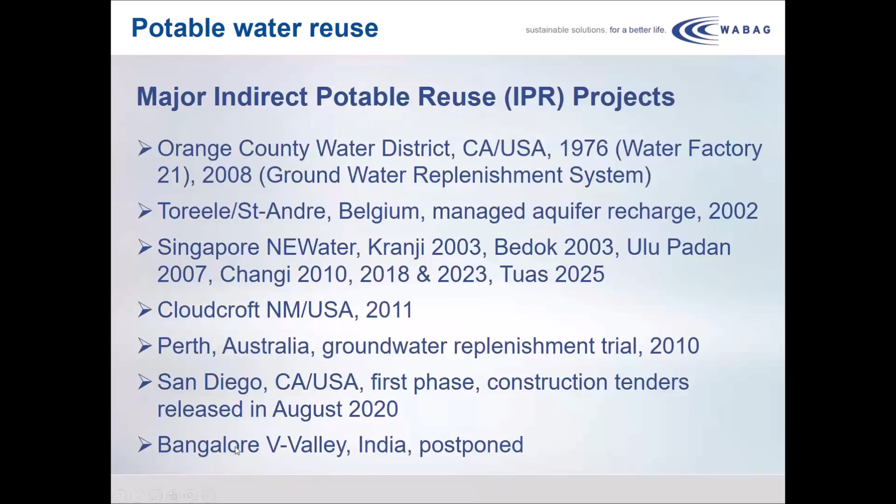Now I come to major direct potable reuse, DPR, projects. First of all, I would like to mention Windhoek. They started in 1968 in the old Goreangab water reclamation plant without advanced technology - this means no ozone, no membranes. In 2002, the new Goreangab water reclamation plant was commissioned, and it has successfully operated since then.

Another project in Southern Africa is Beaufort West; they started in 2011. The Big Spring blending operation in Texas started in May 2013. Big Spring and Wichita Falls were also mentioned by Eileen. Wichita Falls was an emergency operation from 2014 to 2015.

Then last but not least, the interesting project also mentioned by Eileen, El Paso. Pilot testing has been completed, and the full-scale advanced water purification facility is in the design stage. This is the water reclamation plant.

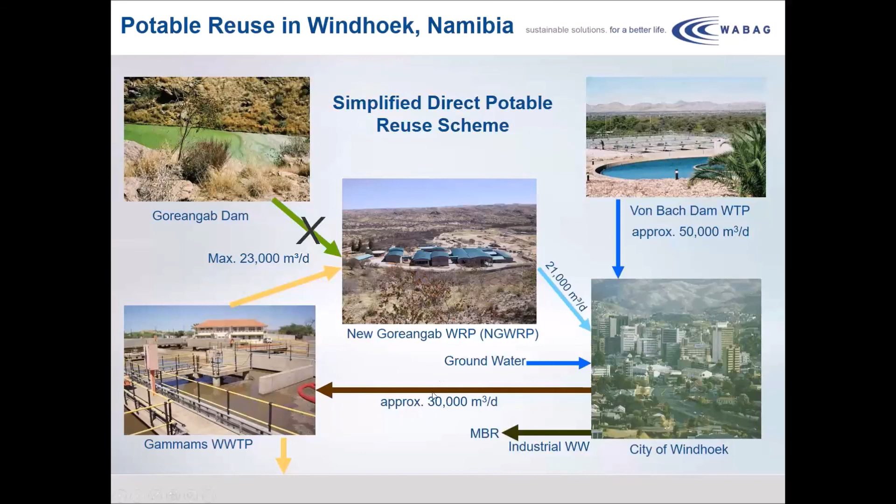Now I will present the Windhoek case. You see a simplified direct potable reuse scheme. The raw water is secondary effluent from the Gammams wastewater treatment plant, which is polished in maturation ponds and then treated in the new Goreangab water reclamation plant. A maximum of 21,000 cubic meters a day is blended with treated dam water and groundwater. On an average basis, 25% of the potable water supplied to the Windhoek population is reclaimed water. Industrial wastewater is strictly separated and treated by an MBR in order not to contaminate domestic sewage with industrial pollutants.

The reclamation plant process diagram includes pre-ozonation for pre-oxidation and pre-disinfection, then particle separation by coagulation, flocculation, dissolved air flotation, and dual media filtration. Main ozonation provides main disinfection and oxidation of micropollutants, followed by polishing with biologically activated carbon, adsorption of residual micropollutants on granular activated carbon, ultrafiltration for removal of residual protozoa and bacteria, chlorine disinfection, and stabilization with sodium hydroxide.

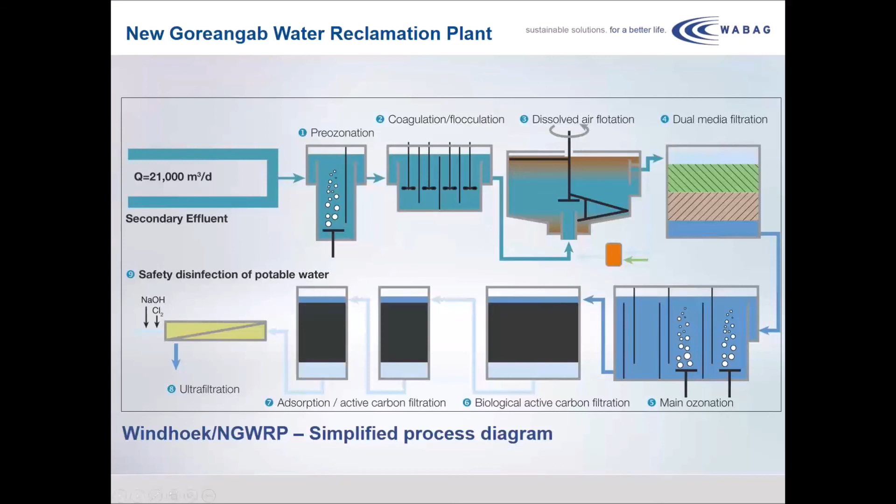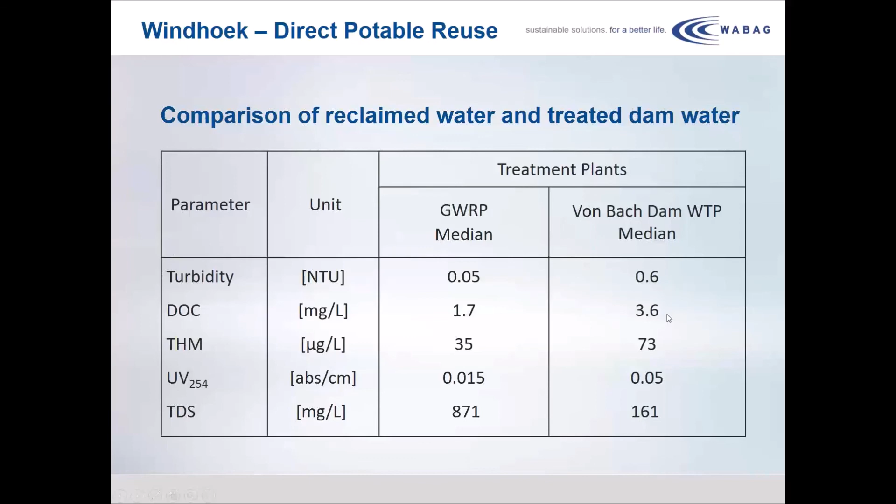A comparison of reclaimed water quality and treated dam water quality shows the reclaimed water quality is superior. For example, turbidity is 0.05 NTU for reclaimed water versus 0.6 NTU for dam water, and dissolved organic carbon is 1.7 milligrams per liter in reclaimed water versus 3.6 in the treated dam water.

Why has it been accepted in Windhoek? There was no other choice due to severe water stress and lack of other cost-effective options. Transport from distant sources is 5 times more expensive than DPR. Very importantly, since the beginning of direct potable reuse in '68, no outbreak of waterborne disease has been experienced and no negative health effects have been attributed to the use of reclaimed water. The city of Windhoek has an excellent information policy, and there is trust in the multiple barrier approach and technology.

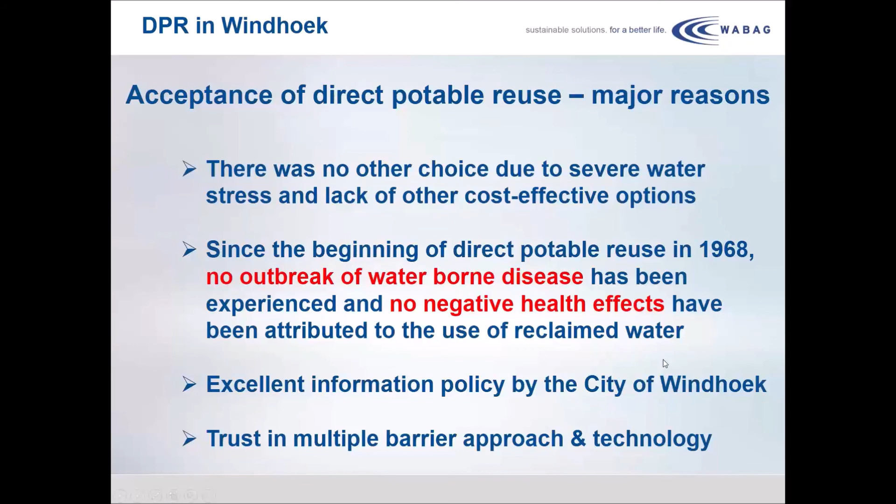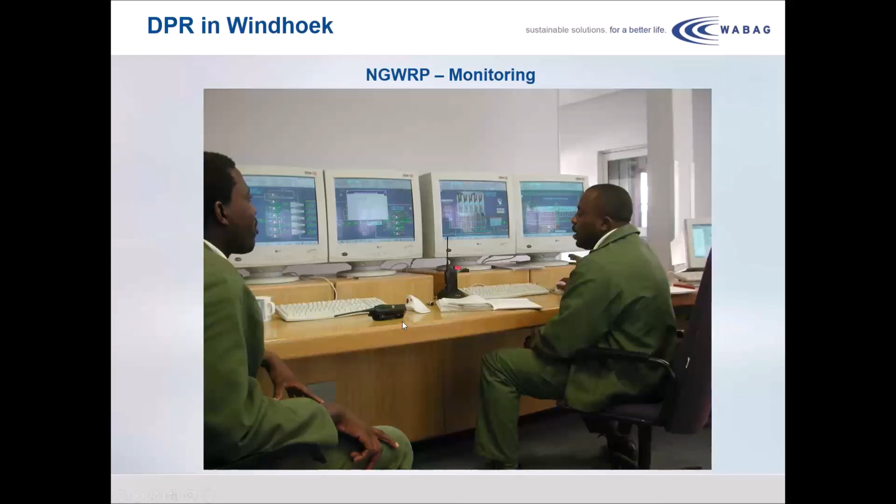The new Goreangab water reclamation plant is monitored by local staff, which increases trust, and the plant has been operated during the current crisis without any disturbances. This is essential, as water supply is secured by this reclamation plant. The maintenance is also done by local staff, so we can say it's a real success story.

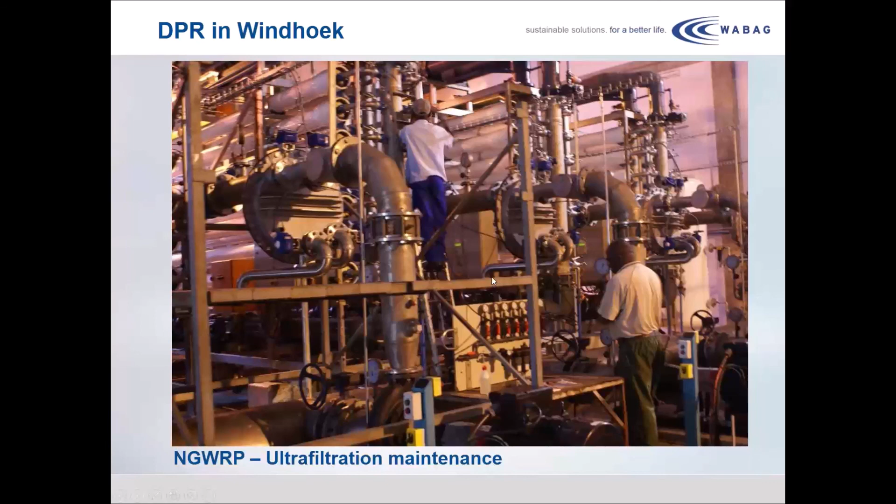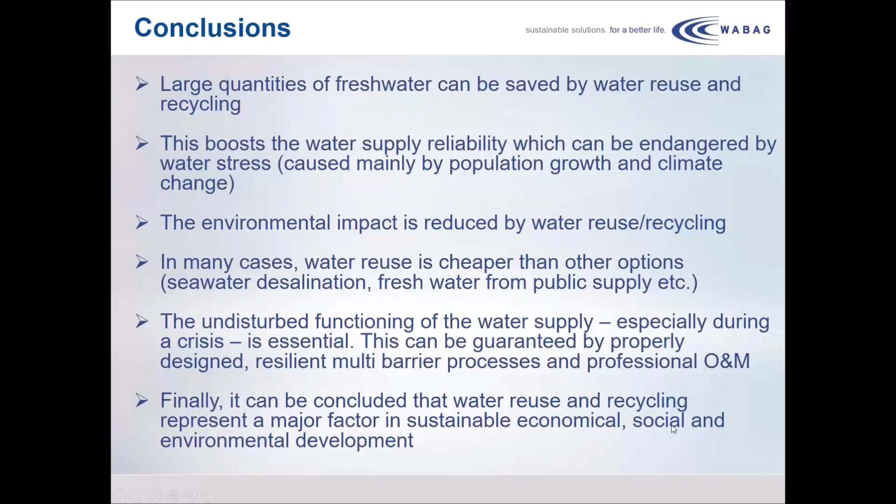Now I come to the overall conclusions. Large quantities of fresh water can be saved by water reuse, which boosts water supply security. The environmental impact is reduced, and in many cases water reuse is cheaper than other options. The undisturbed functioning of water supply, especially during a crisis such as the current one, is essential - this can be guaranteed by properly designed, resilient, multiple barrier processes and professional operation. Finally, it can be concluded that water reuse represents a major factor in sustainable development.